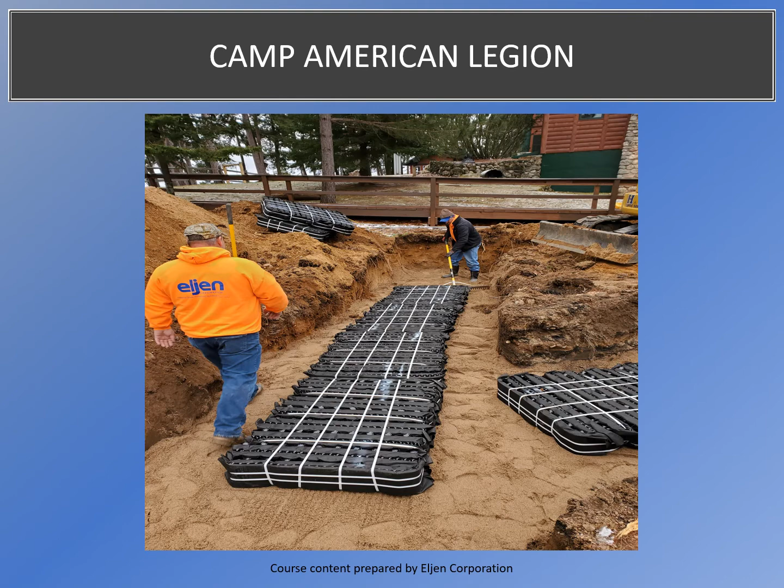Camp American Legion is located on Lake Tomahawk in Wisconsin. They have 16 cabins, all on septic systems, and any veteran is allowed to go there, stay, fish, hunt, or just relax in the location out in the woods free of charge. So we thought this was a worthy donation for us.

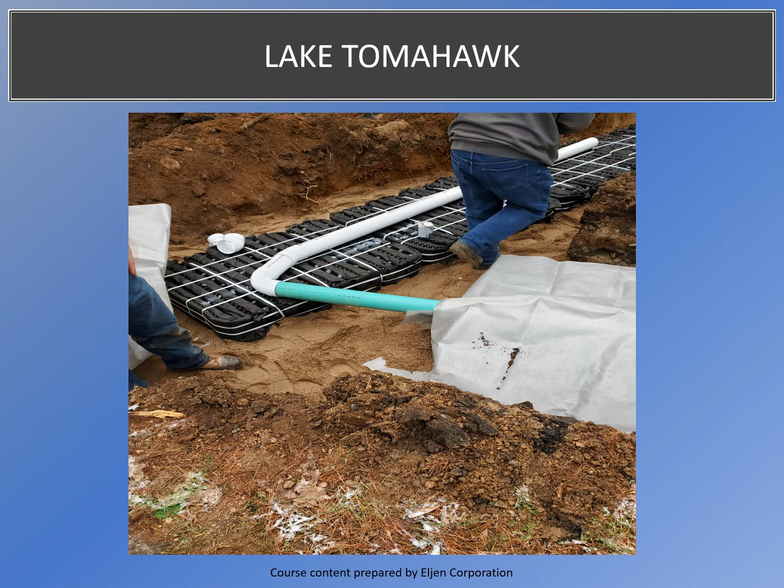Now let's take a look at some of the science behind the GSF. The scientific studies below show that the biological soil clogging is caused from septic tank effluent. This soil clogging will define the absorption rate. Geotextile fabric will improve the absorption rate by filtering out the solids.

Sidewall and bottom area do accept effluent, and the loading rates for highly pretreated effluent are going to be different because the soil will be able to process pretreated effluent at a faster rate than it would standard septic tank effluent. This led to the development of the Tyler chart.

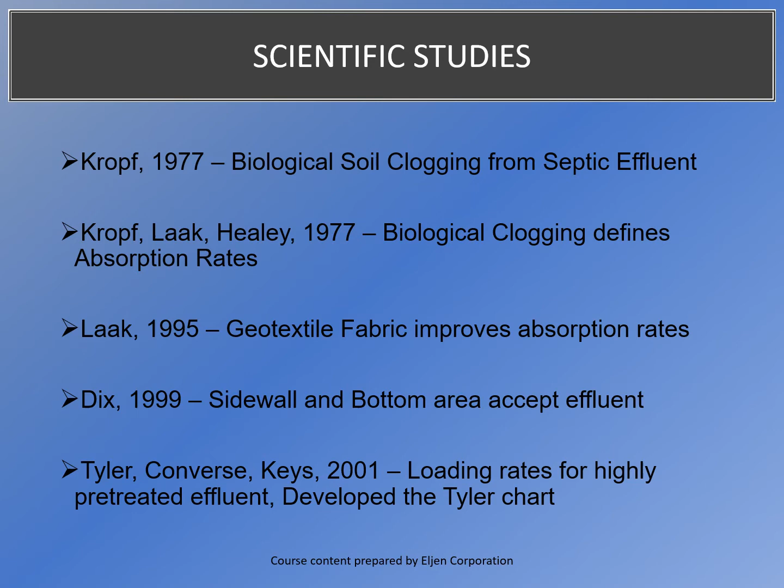The picture below shows the basic principles behind soil clogging. Heavy loading of the soil with liquid effluent can cause soil saturation. Long-term soil saturation reduces the aerobic activity within the soil. The reduced aerobic activity prevents the natural breakdown of organic material. Suspended solids in the effluent clog the soil pore structure, reducing the long-term acceptance rate of the soil.

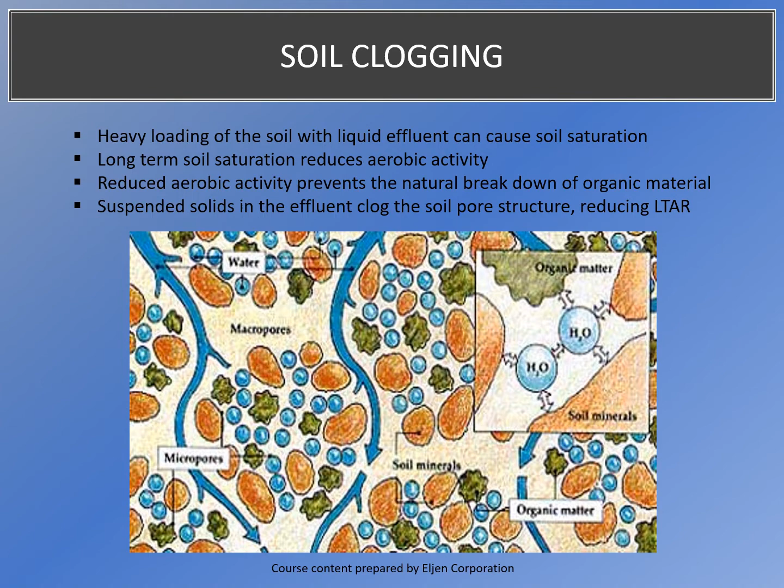What is biomat? Once the pore structure of the soil begins to clog and stay wet, biomat begins to develop at a faster rate. This is a naturally occurring tar-like substance, but it also processes biological solids and pathogens. When it grows to a thick barrier, it stops absorption, and then you will have a breakout and system failure.

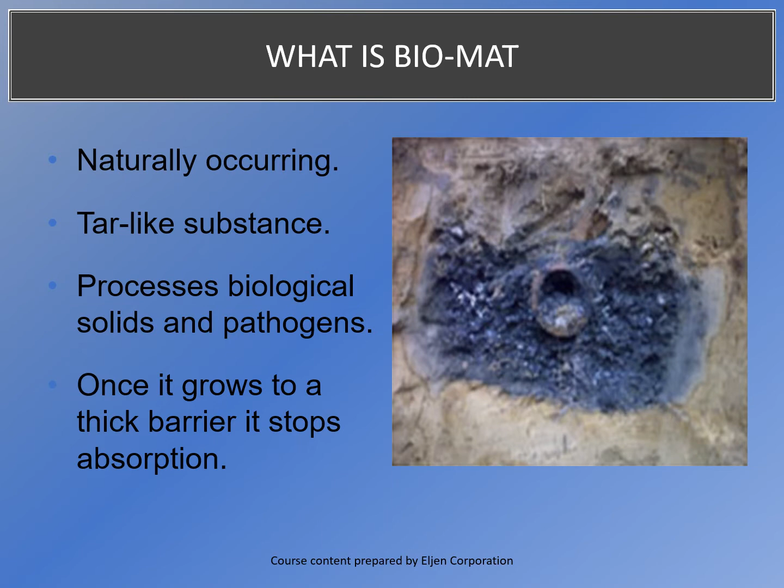Once you have soil saturation, the only bacteria that you are relying on to break down the biomat is anaerobic bacteria. Anaerobic bacteria is similar to the bacteria working in the septic tank. It does not use oxygen. They are typically in saturated areas. They are more capable of breaking down inorganic solids than aerobic bacteria.

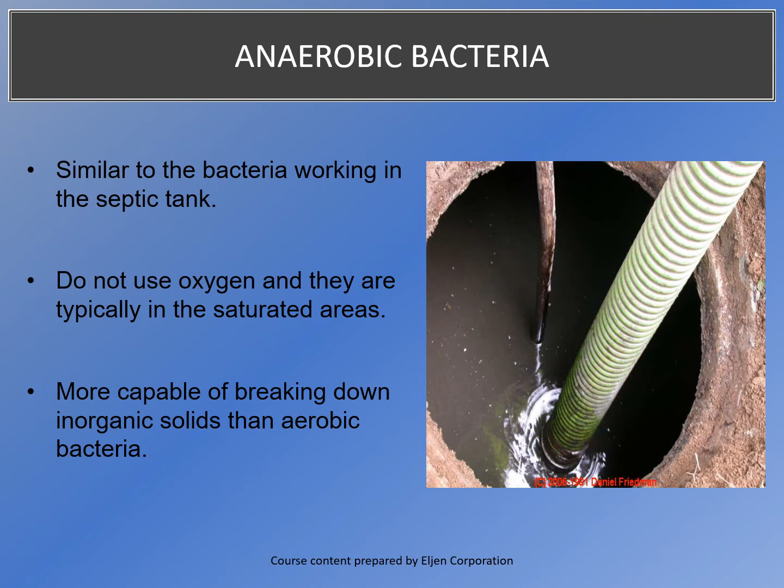You can see the aerobic bacteria is larger than the anaerobic bacteria. It's also better at breaking down human waste, but it does require oxygen, and it helps break down the biomat to keep it at a manageable level.

If you were to look at the two bacteria under a microscope, the anaerobic bacteria might twitch, move a very little bit, but not much action, whereas the aerobic bacteria will be darting around, going back and forth, very active. It's always looking for food and always wants to eat. That's why it's better at breaking down human waste and organic material than the anaerobic bacteria.

So how does the GSF work? At Eljen, we like to explain how the GSF works by comparing it to the tidal effect on a pier pylon. Where does this pier pylon rot? They don't rot below the water level on the bottom in the sand. They don't rot up on the top where the decking is. They rot between the low and high tide level.

So if you can imagine, the pylon is the geotextile fabric providing vertical surface area inside the module. When the high tide effect comes in, or when your system is dosed, it's depositing organic material on the geotextile fabric. As the effluent leaves the GSF module, it becomes an aerobic treatment zone. The aerobic bacteria go into the module and they begin to eat all the organic material, keeping the biomat at a manageable level.

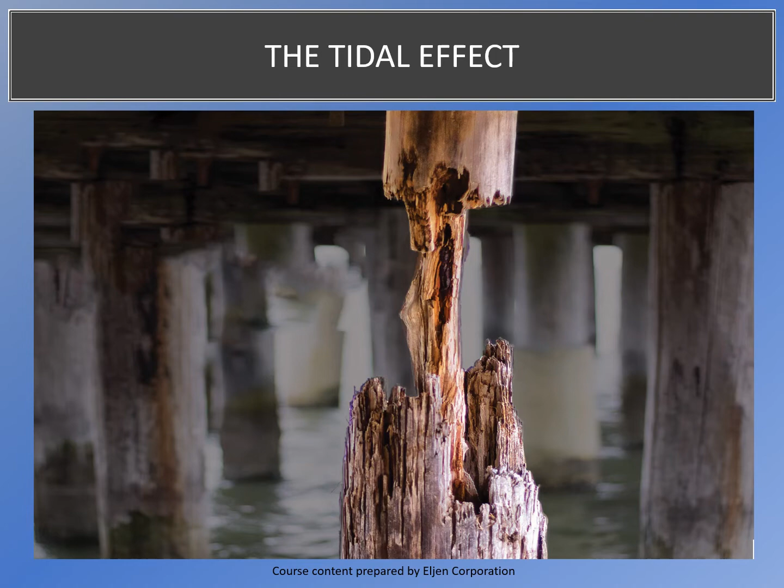The geotextile fabric within the module provides surface area for filtration and biological development. This promotes biomat growth away from the soil interface, preserves the sand soil interface by minimizing clogging and promotion of unsaturated flow. Having this effluent build up on the geotextile fabric and having the module surrounded by the sand will allow the effluent to flow out at a metered rate.

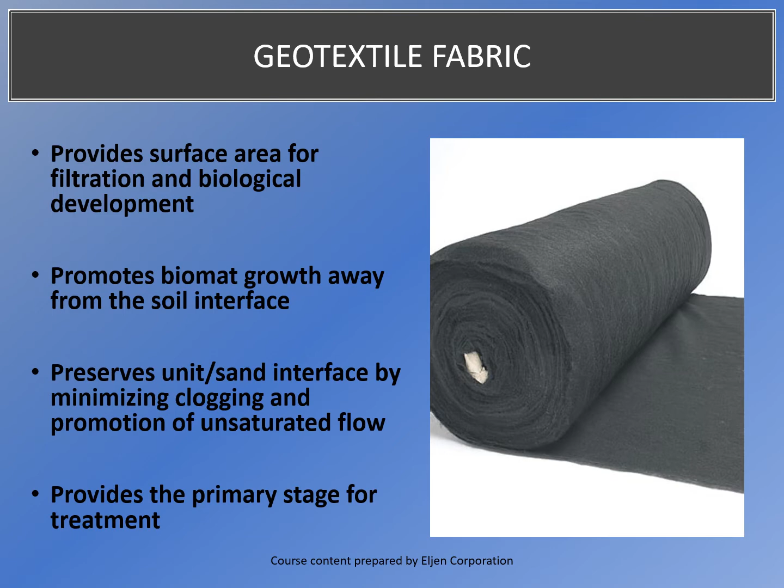So if you have a really fast soil, the effluent is still going to get treatment as it goes through the module and through the sand. If you have a really tight soil, a clay or something, the effluent will flow out of the module at a rate that will not cause saturation of the soil. This geotextile fabric also provides a primary stage for treatment within the GSF module.

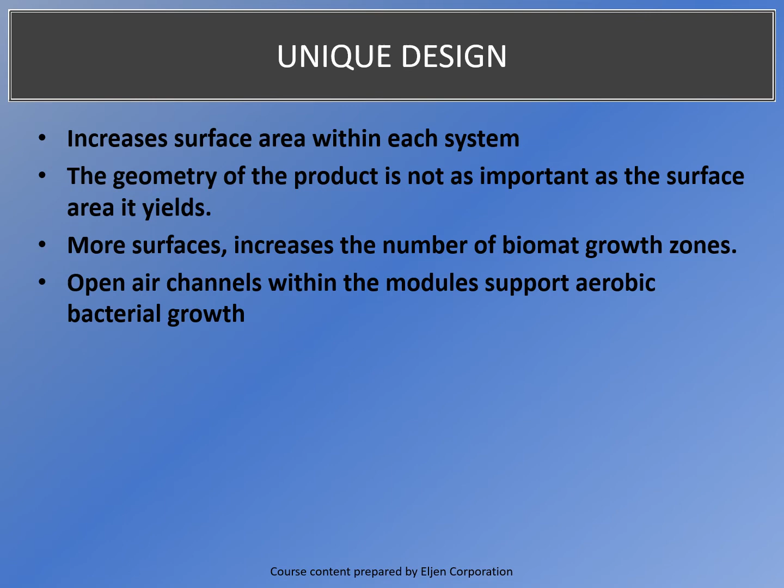The unique design within the GSF increases the surface area within each system. The geometry of the product is not as important as the surface area that it yields. The more surfaces increase the number of biomat growth zones, and the open air channels within the module support the aerobic activity.

Rain Locke is the designer of the GSF, and he sat down one day at his desk and drew these designs on a piece of paper. And he realized that he could get more surface area inside a 3-foot wide trench by taking advantage of the open space and creating vertical surfaces on the GSF modules.

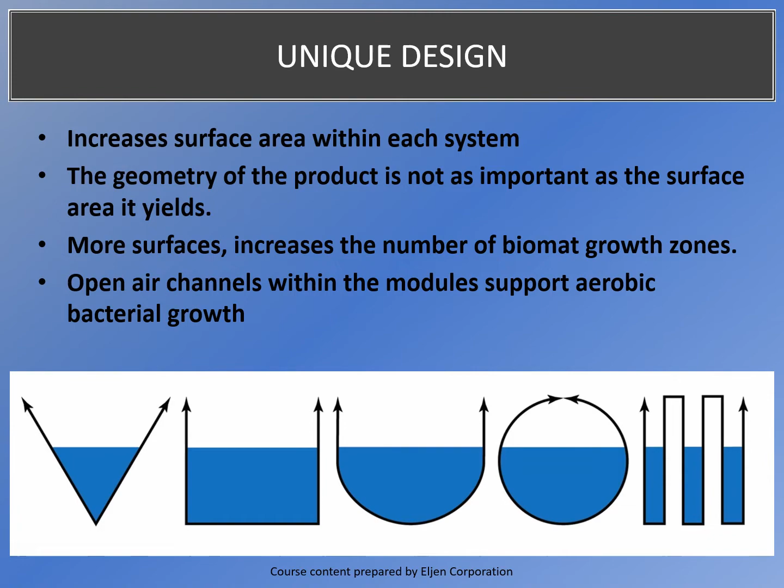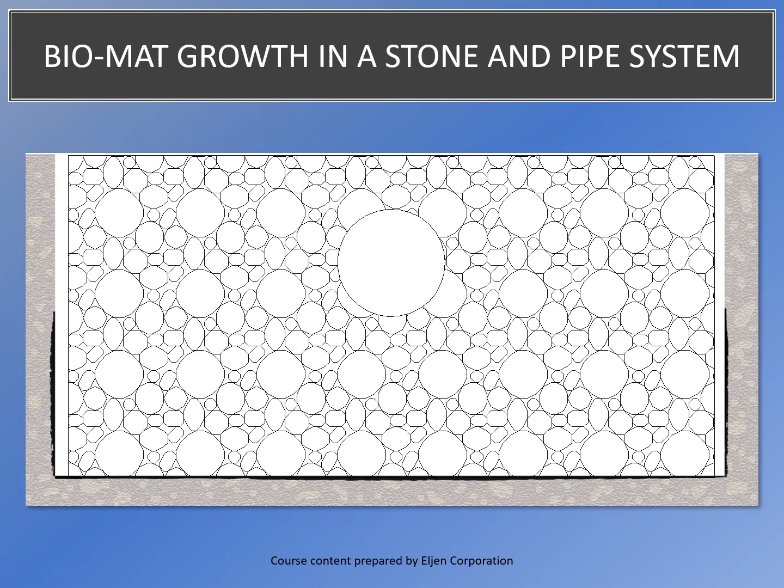The effluent that goes through the sand and into the soil is clarified effluent and looks like tap water, and has no odor when it goes into the soil. This increases your long-term acceptance rate.

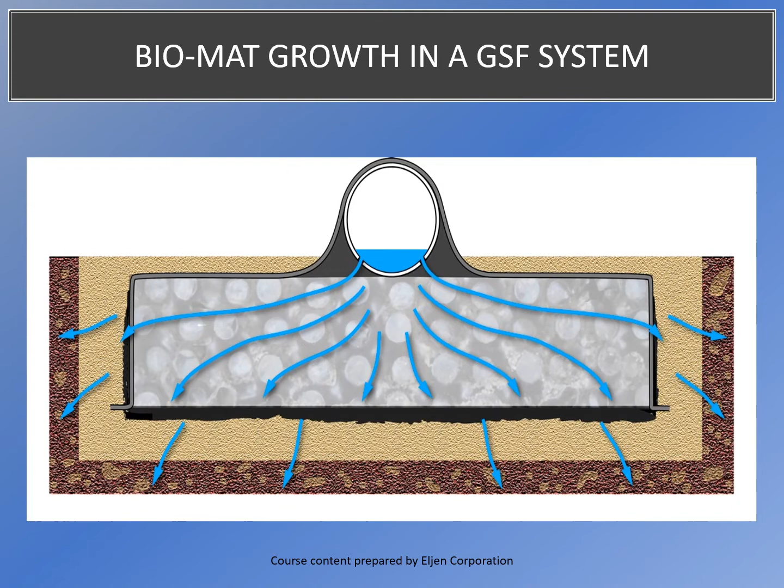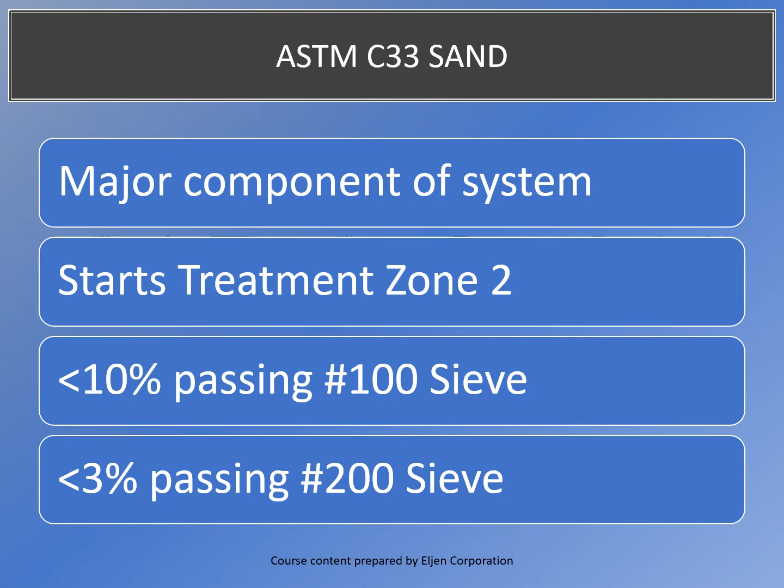The sand used below the GSF module is ASTM C33 sand. The ASTM C33 sand is a major component of the system, and it is the secondary treatment zone for the effluent. The requirements are less than 10% passing a 100 sieve and less than 3% passing a 200 sieve. The lack of fines in this sand make it very effective at treating effluent and not clogging the soil pores. This is just a picture of all the ASTM C33 sand specifications.

If you're using a sand that has excessive fines, the fines interlock with larger particles, preventing water from moving through the sand. The wastewater will pond and the biomat will quickly grow, shutting down the system. Fines are always a killer for sand-based systems.

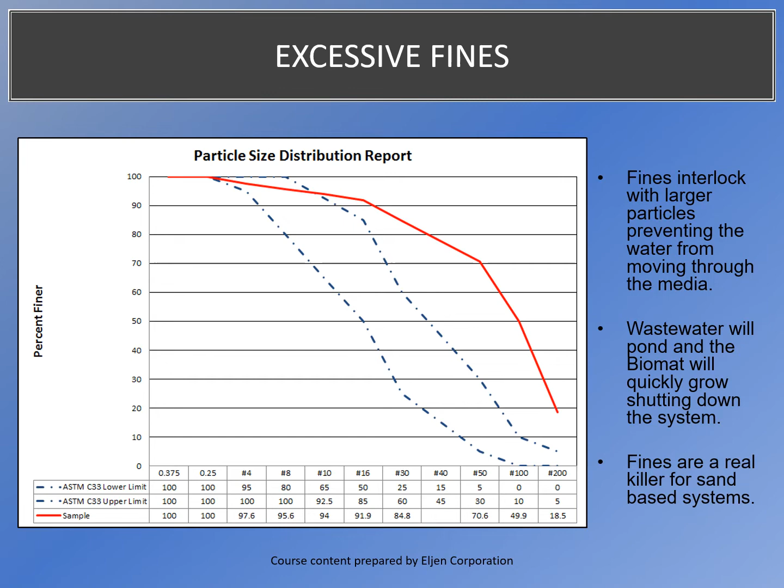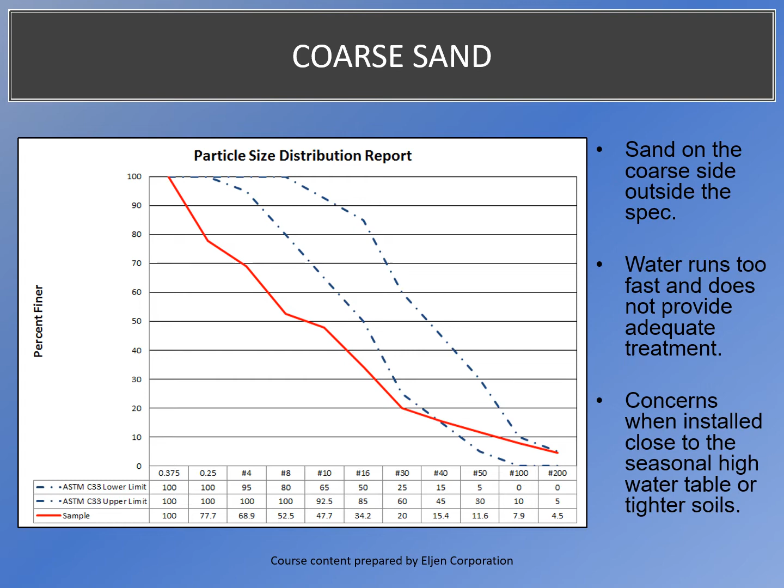Sand on the coarse side of the spec will allow the effluent to run out too fast and not provide adequate treatment of the effluent. The concern here is when installed close to a seasonal high water table, you could contaminate the water, or if you're in a tight soil, you could saturate that soil. You always want to use a sand that is in the middle of the high and low specification for the ASTM C33 sand.

Now let's discuss the GSF design options. The minimum sizing for a GSF A42 module is 6 modules per bedroom, or 6 modules for every 150 gallons of effluent. The A42 dimensions are 7 inches thick, 3 feet wide, and 4 feet long. The white stripe you see on either end represents the top side of the module.

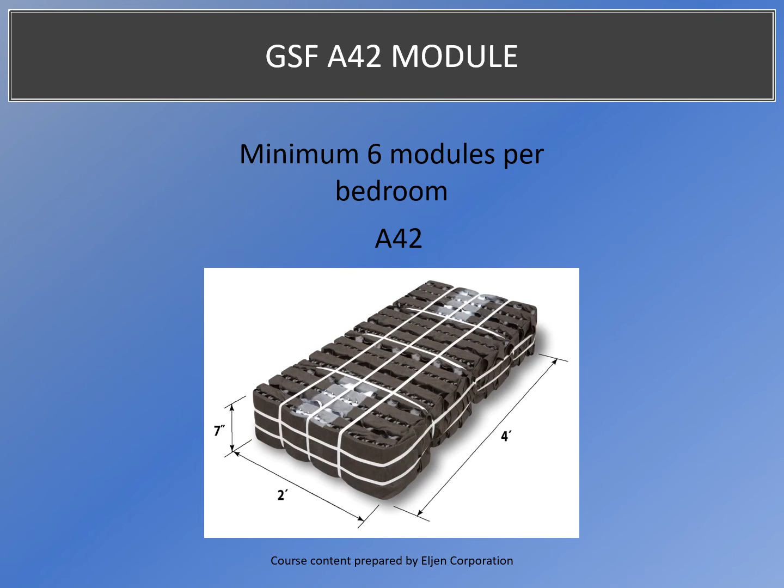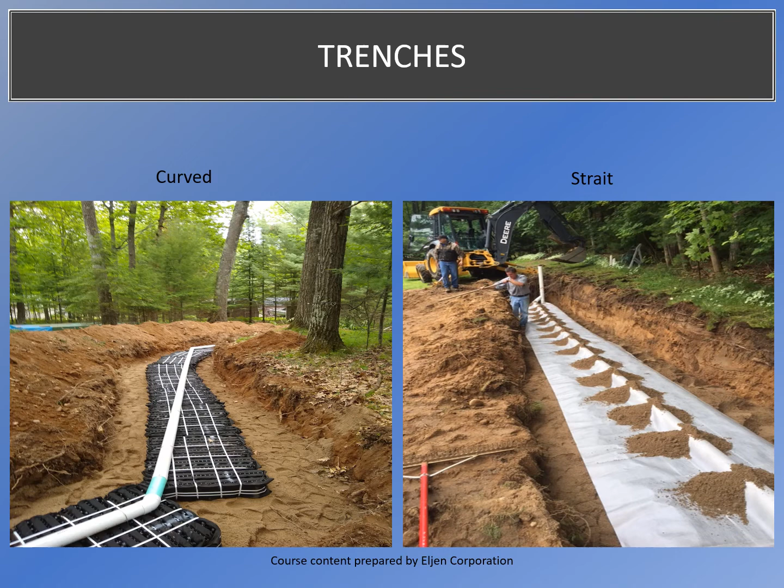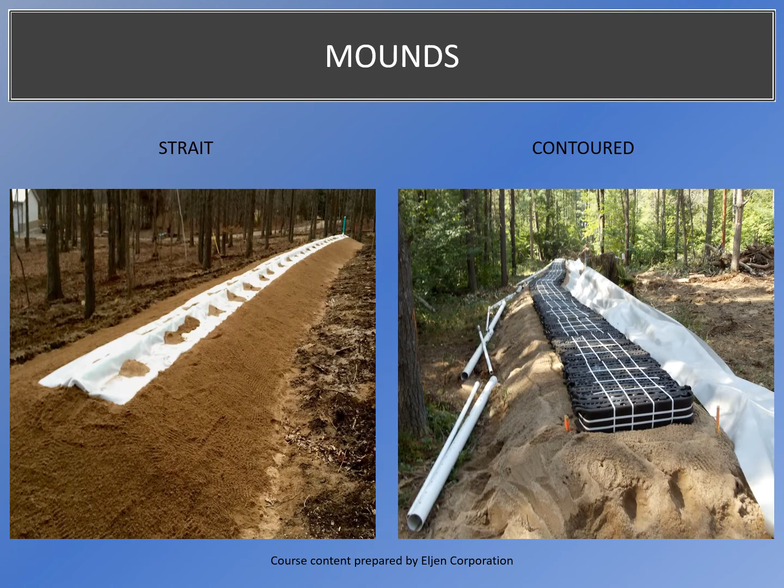Trench installation options are curved or straight. The picture on the left is a zigzag, and this was on a lake lot where the new homeowner tore down the old house, built a larger house, and did not want to remove any trees. We were able to zigzag the system in between his driveway in the front yard and his neighbor's driveway while meeting all the setbacks. The GSF models can be installed in beds, and the mound options are straight or contoured.

This is an A42 trench cross section, and you'll notice that the trench is 36 inches wide, while the A42 module is 24 inches wide. 6 inches of sand is required on either side of the modules when placed in the trench. 6 inches also goes at the very end and at the beginning of the trench rows. We also require a minimum of 6 inches of sand below the module and 12 inches of cover as measured from the top of the module.

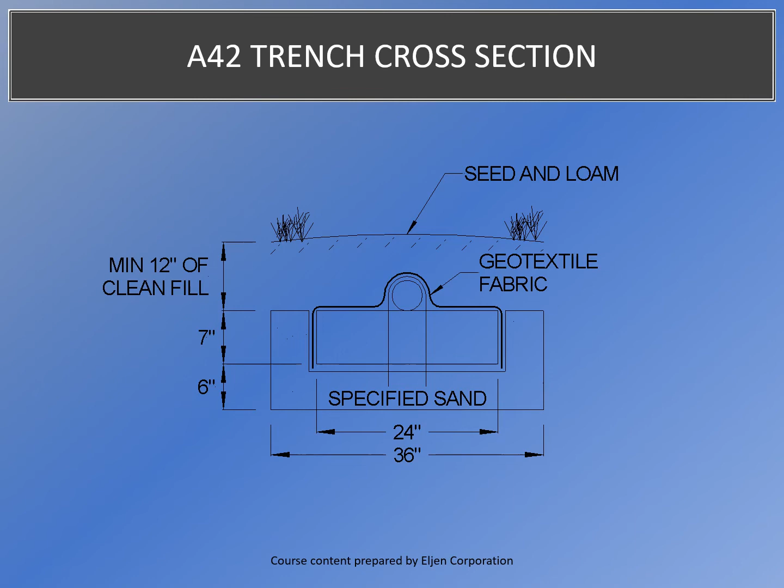This is a trench plan view. You can see that the modules are placed end to end, lengthwise in the trench and surrounded by 6 inches of C33 sand. This is multiple trench rows where you are required to have a minimum of undisturbed native soil in between the trenches. Please refer to your county code for the distance. This one shows 6 feet. Some counties require 9 feet. Some counties require 3 feet. So please refer to the code.

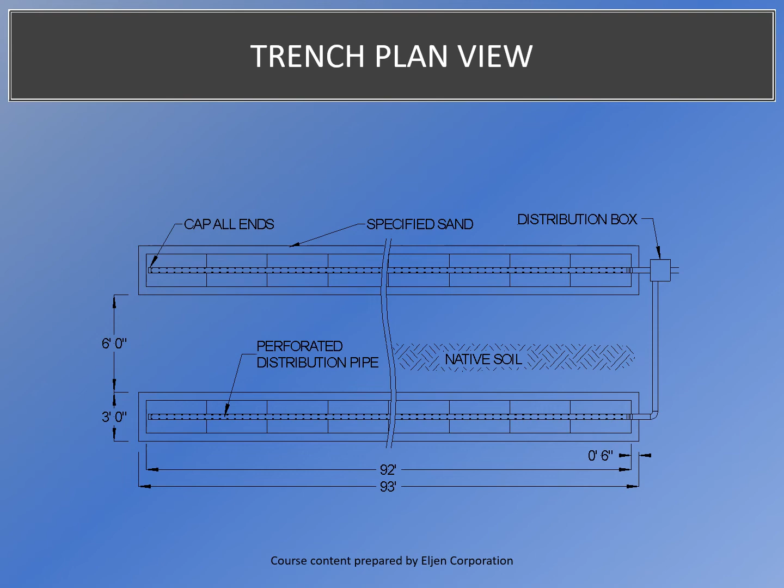Here's a bed cross section, and you can see that there is no native material in between the rows, only sand. It's a minimum of 6 inches on either side of the module, so you have to have a minimum of 1 foot of sand between the modules. Typically, we center the 2 rows inside the bed.

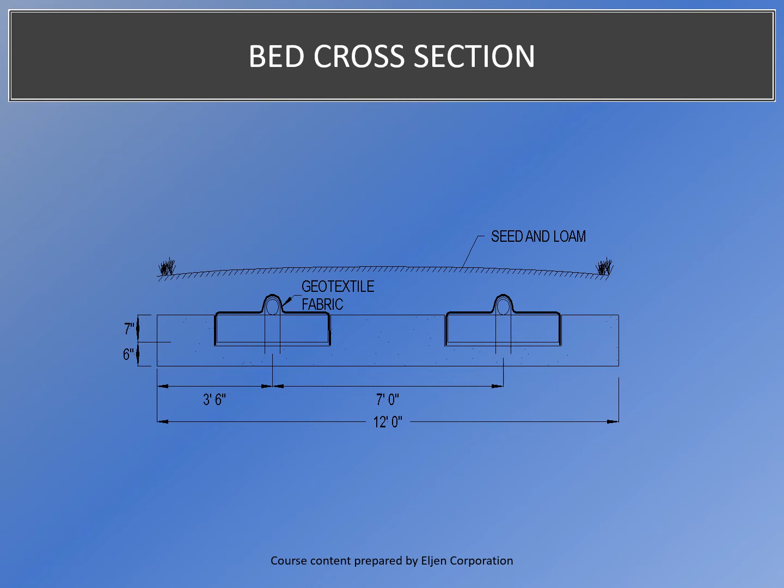Here is the bed plan view. You can see that we have 6 inches of sand on either end of the modules as they are installed, but the 2 rows are centered inside the bed system.

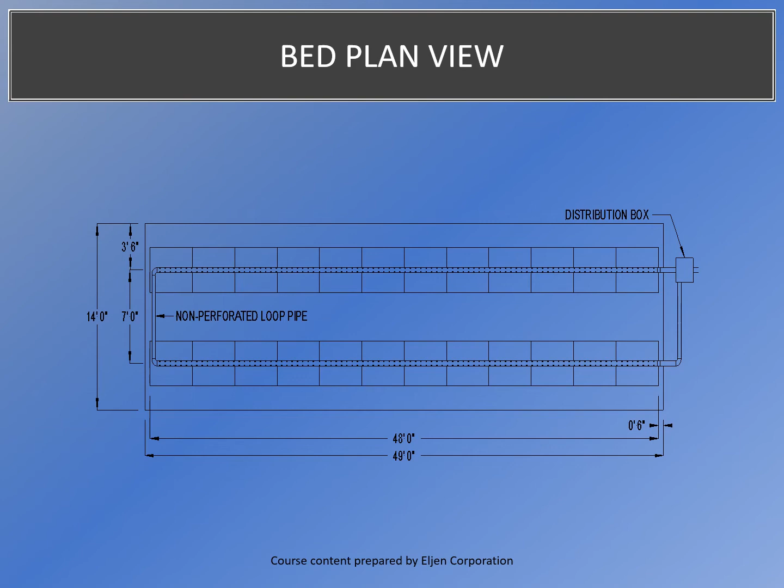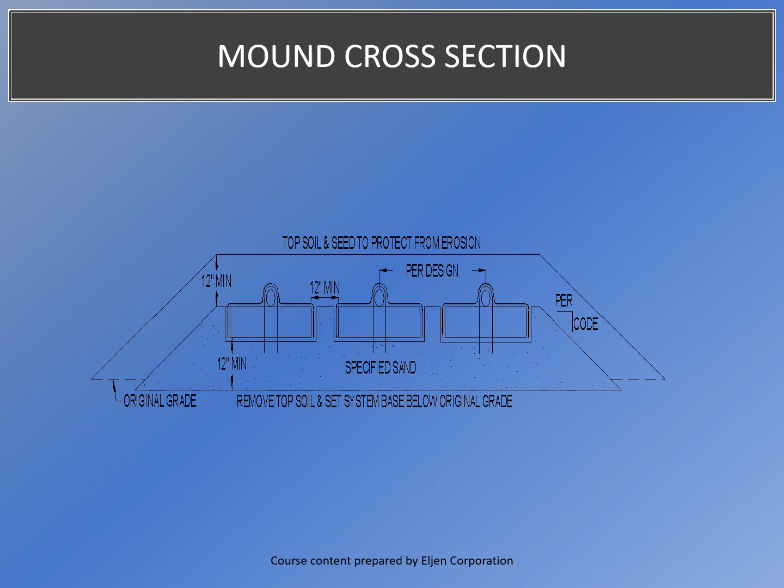Usually there's a 3-to-1 slope on the sides of the modules in your mound, and depending on the slope of your site, your toe will vary. The distribution methods for the GSF system are gravity or siphon dose. You can do a pump to gravity where we like to use a D-box, or pressure distribution is allowed.

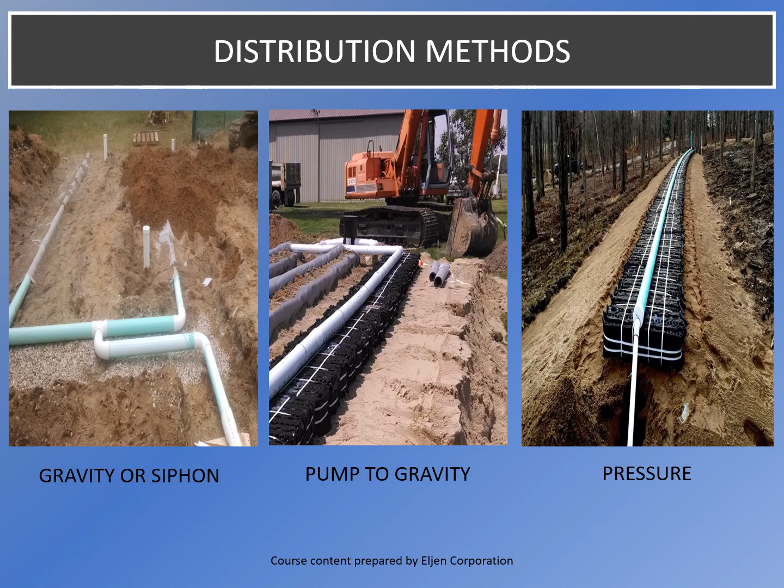When installing a pump to gravity system with a distribution box, Eljen requires that a velocity reduction pipe be installed about 2 to 3 feet before the distribution box. If the force main gets pumped directly into the distribution box, the high velocity flow into the box may force effluent down one pipe faster than another. By installing the velocity reduction, it will allow the distribution box to fill at an equal level.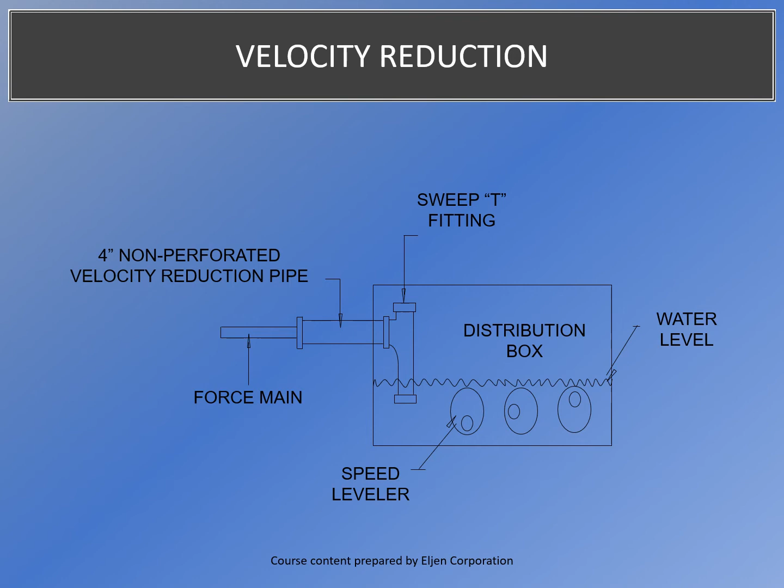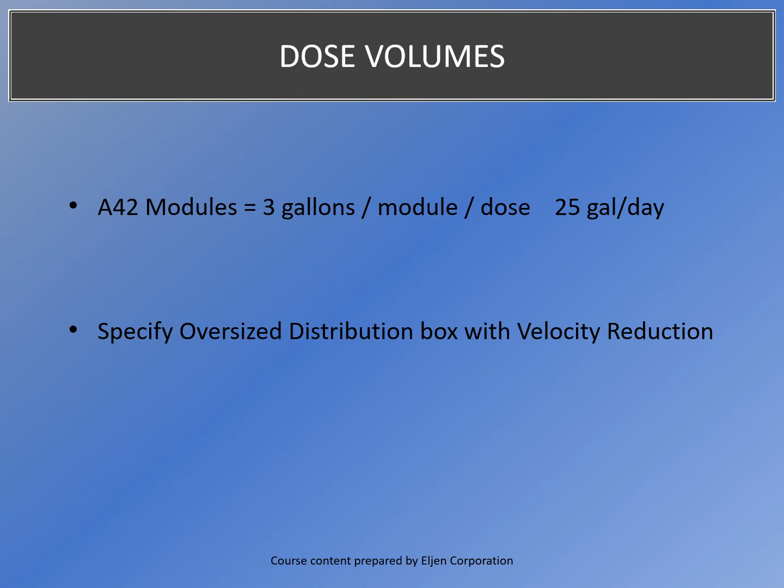The dosing volumes for the A42 modules are 3 gallons per module per dose and 25 gallons per module per day. Next, we will be covering the installation. First, you must prepare the surface by cutting and removing all vegetation as close to the surface as possible.

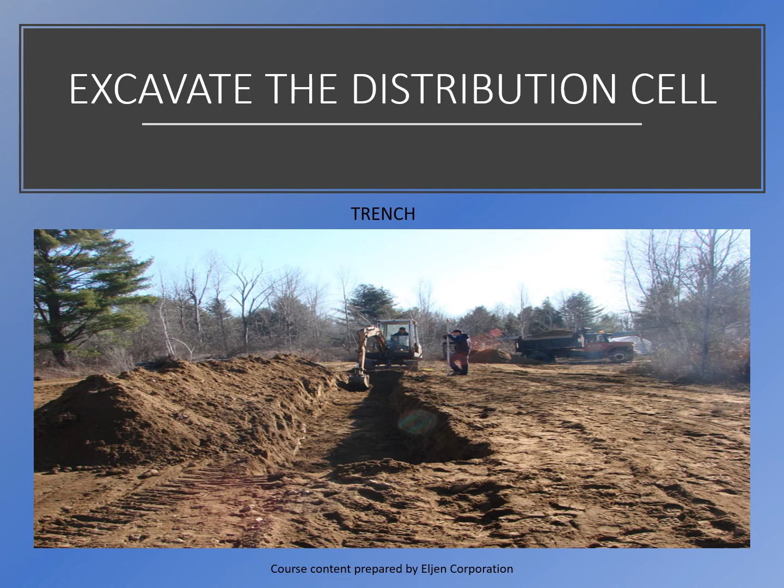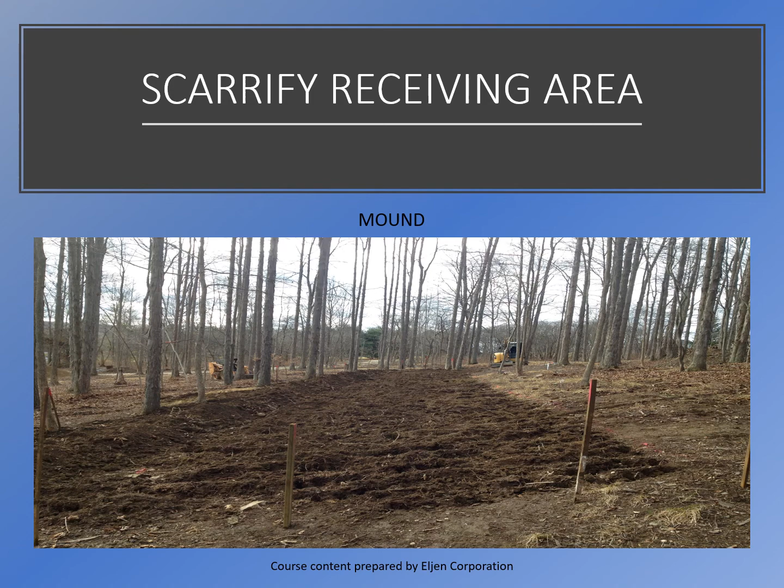Next, we need to excavate the distribution cell. This one is a trench excavation. For a mound, we will scarify the receiving layer or chisel plow. Here is another picture of a mound with scarification. The next step is to place the C33 sand.

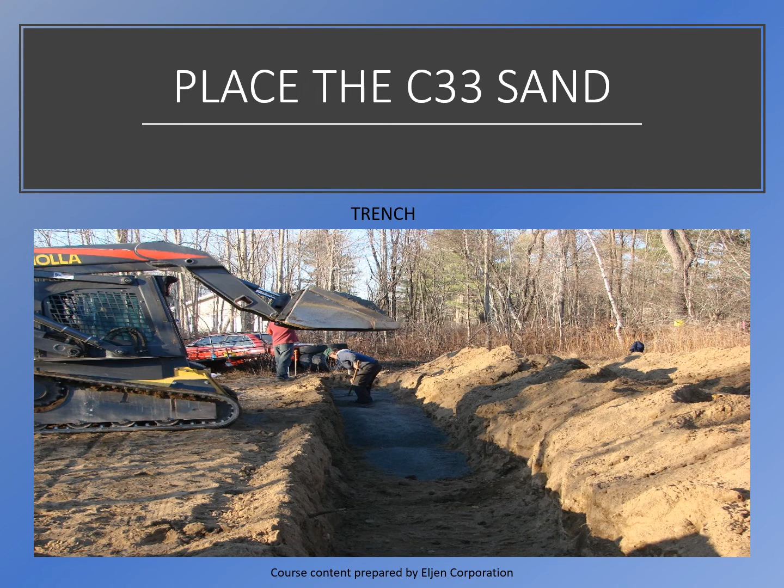Once the sand is placed, we need to stabilize it with the bucket of the backhoe, vibratory tamp, hand tamp, or walk it in. If we don't stabilize the sand, the first time the effluent gets distributed, the sand will find its own level and you could have an uneven system. When placing the sand, be sure not to drive over or walk on top of the scarified surface.

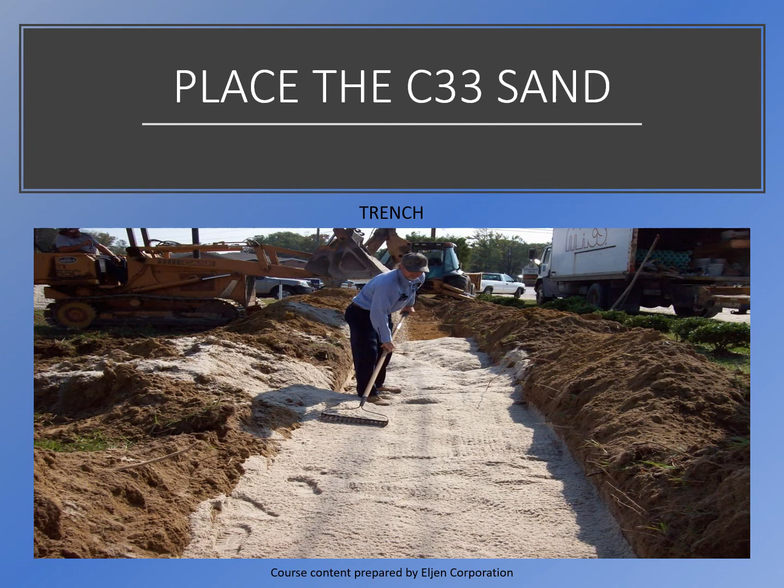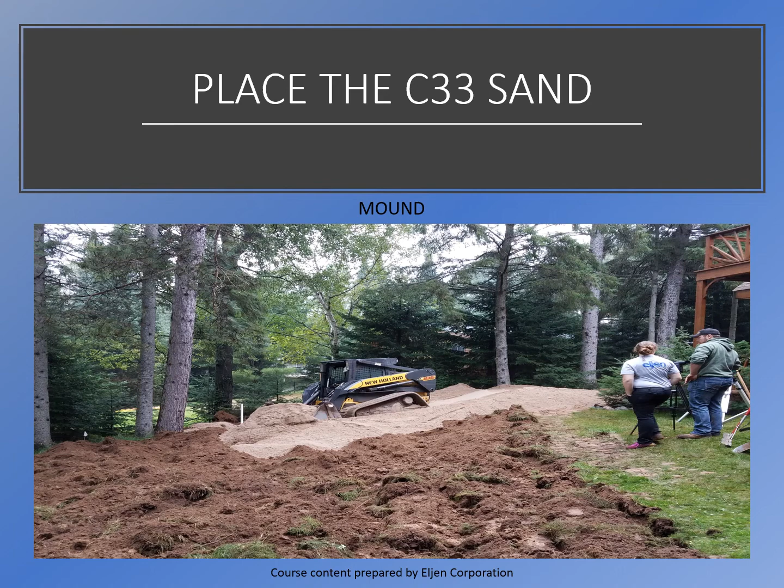Here's an in-ground bed with the sand placed. This picture shows the sand being placed over a chisel plowed mound. You want to make sure that you're driving over the sand. This way the sand will mix with the native soil and it'll provide an excellent transition zone for the effluent to pass through.

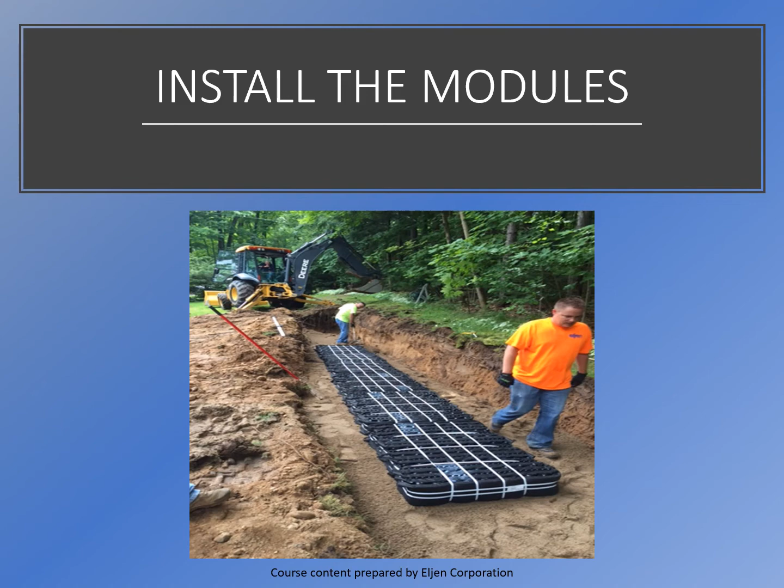Once the sand is in place, the modules need to be installed end to end after everything is raked level. Install the modules either in single or multiple rows. This is a mound configuration with multiple rows. Once the modules are installed, you can begin to lay out your distribution network.

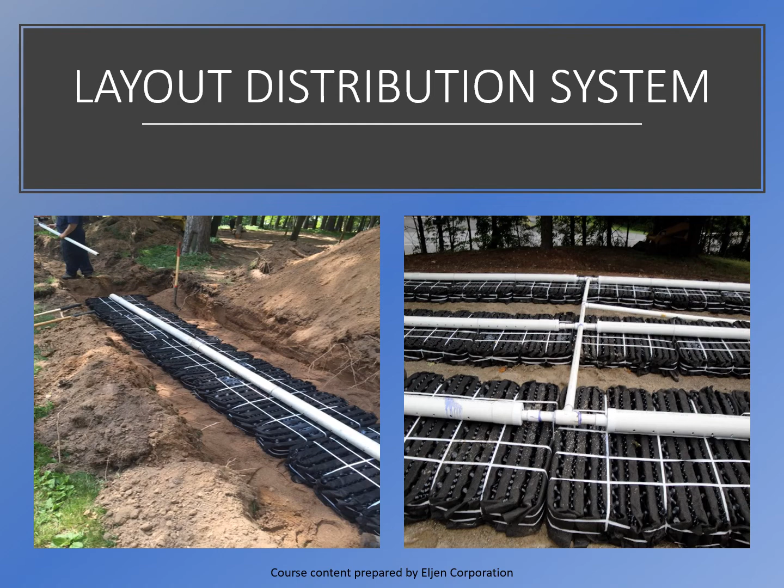When you lay out the distribution network, in order to secure it, there are wire hoops provided by Eljen. Use one wire hoop over the top of the pipe on each module. To install the wire hoop, place it over the distribution pipe and press it through the module into the sand.

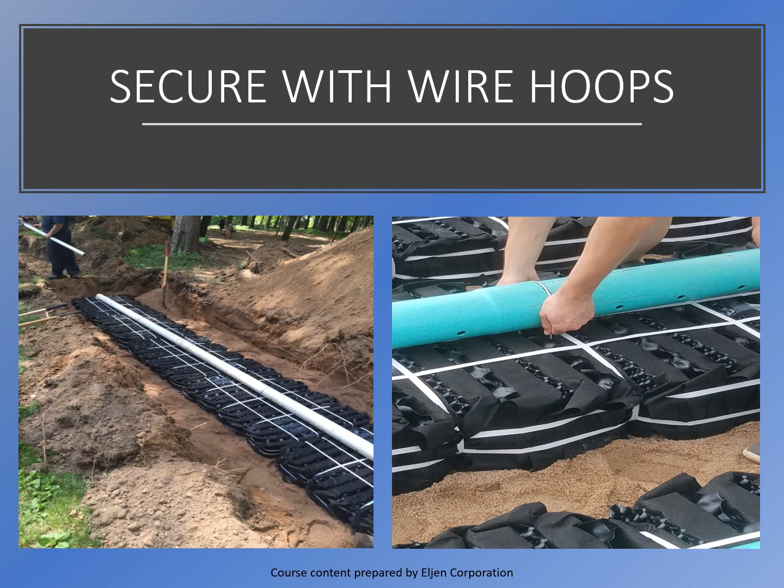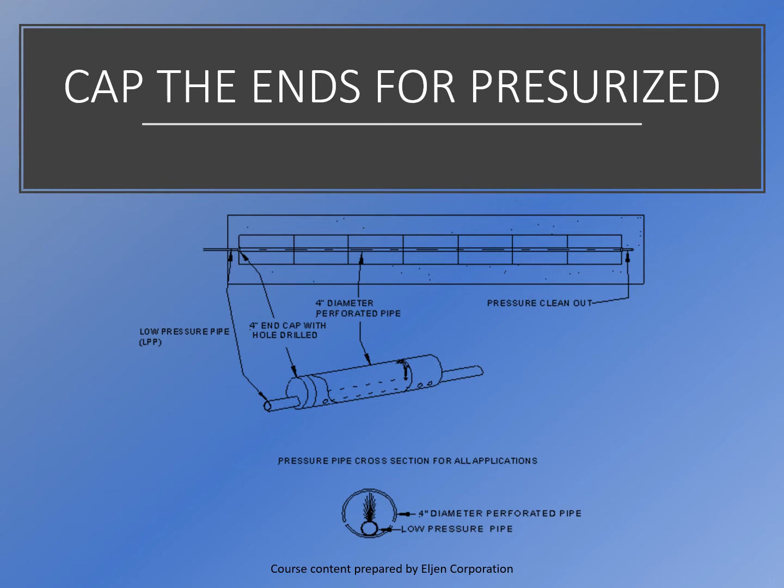When laying out your distribution network, make sure that the ends are capped. Eljen likes to use the pipe in pipe method for pressure distribution. So you cap the ends and use a hole saw to drill your 1.5 or 2-inch low pressure pipe hole.

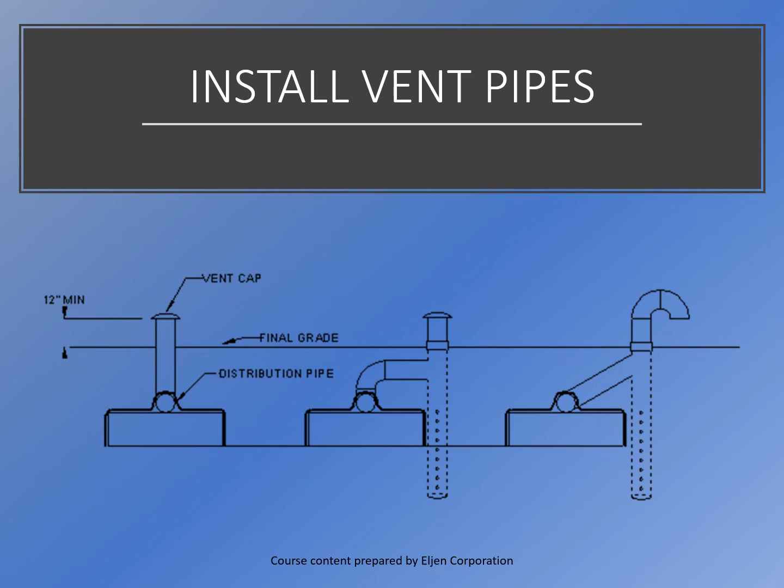Vents are required on the Eljen GSF system if you have 18 inches or more of cover, or if your cover material has clay and will restrict the flow of oxygen down to the modules. You can install a shared vent for multiple rows or a vent on each row.

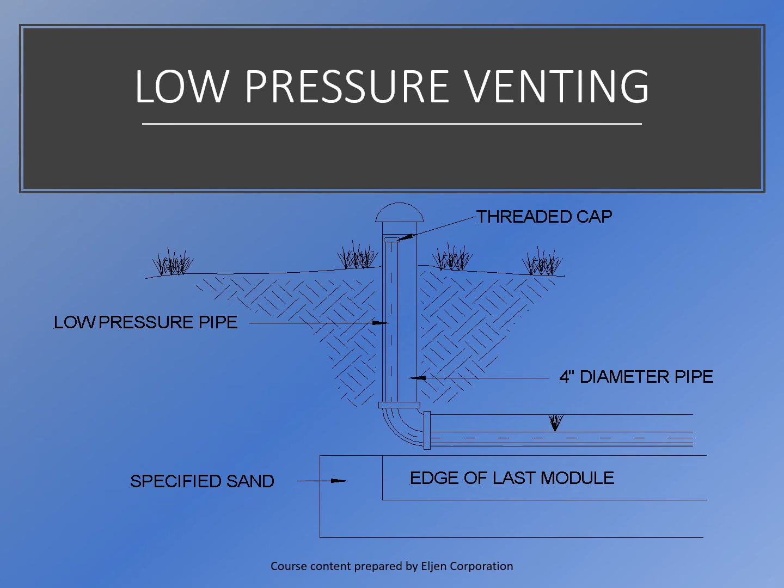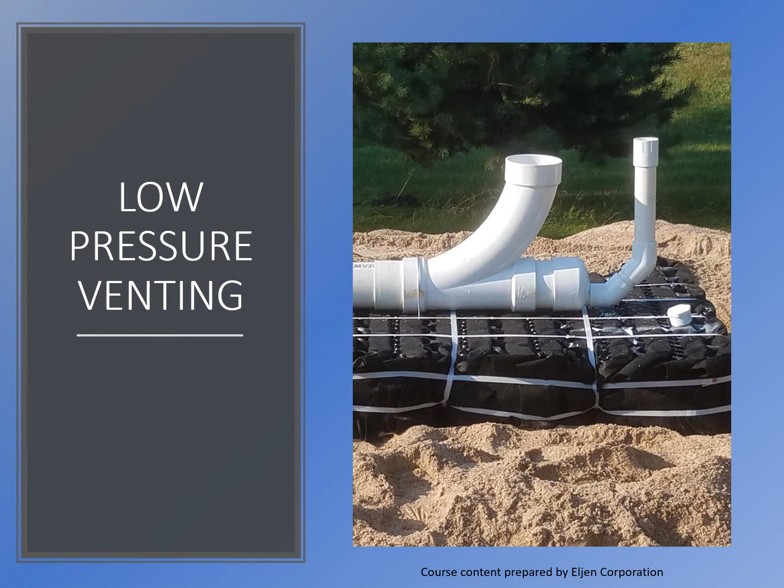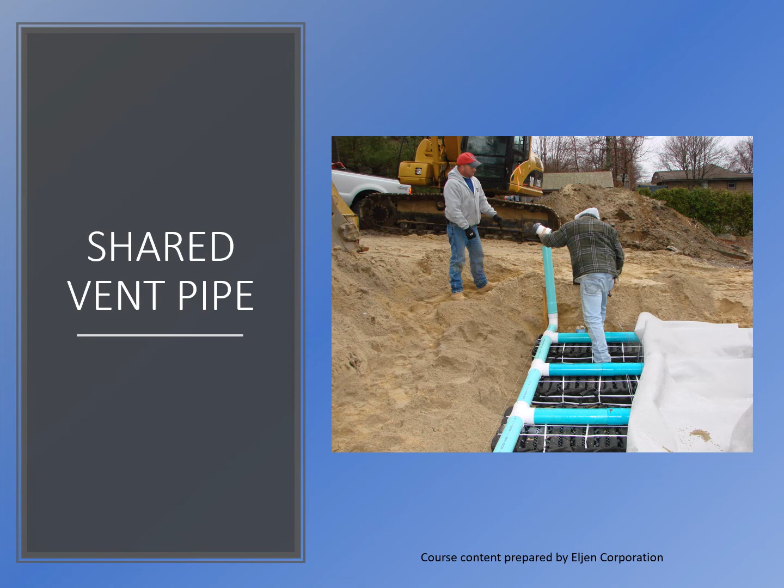This is a 4-row system with the vent pipe placed in the corner on a gravity system. This is fine. It can be in the middle, it can be in the corner. You can put 2, 3, 4 vents on it. 1 vent is fine. Once the distribution network is installed and secured, spread the Eljen supplied gray cover fabric evenly over the top of the modules and the distribution pipe. Let it hang down the sides.

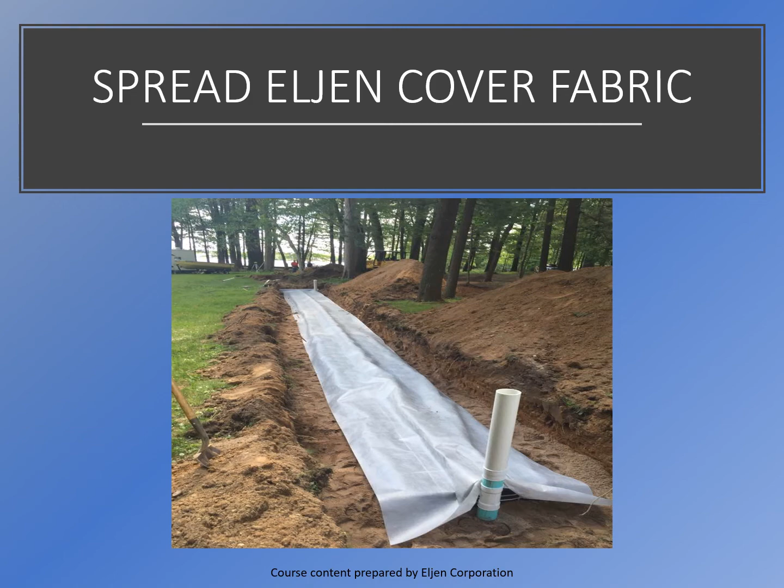Place shovelfuls of sand or topsoil over the top of the distribution pipe so that it falls down on both sides to secure the fabric. We don't want to have any tenting. If you are throwing the sand up against the side of the pipe, you could block the distribution holes in the pipe.

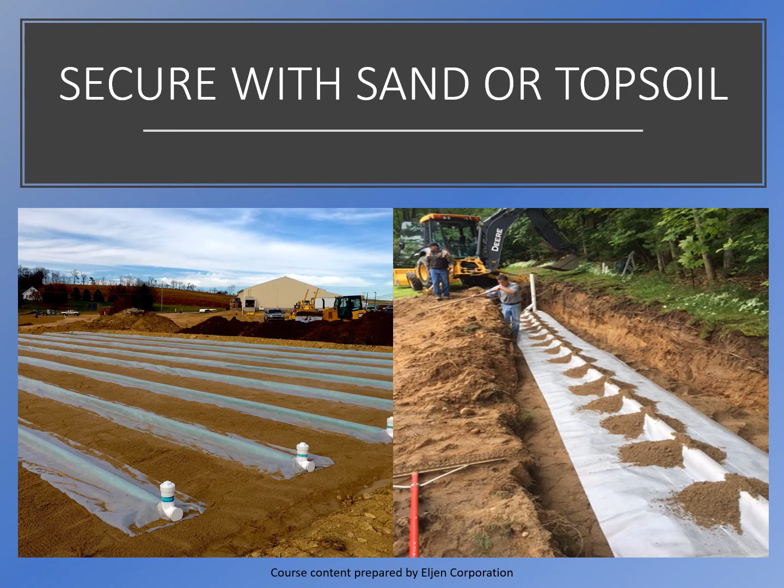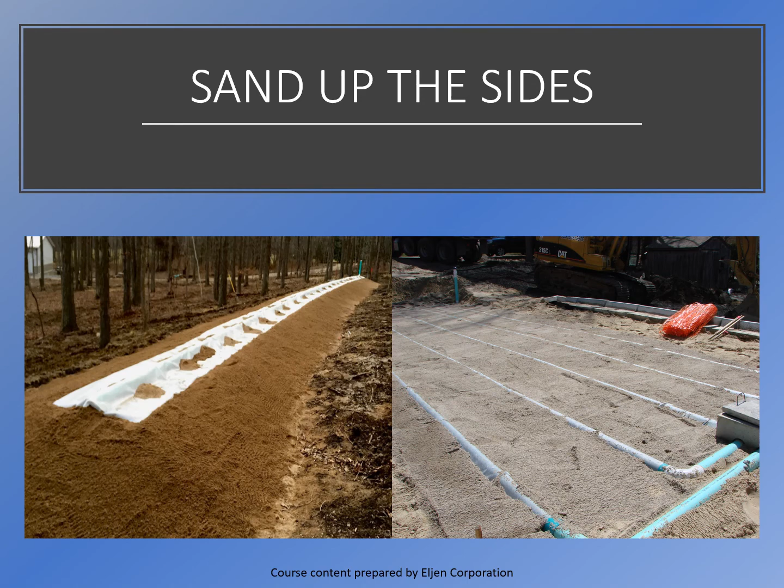Once the fabric is secured on the top, bring the sand up the sides of the module so that it is even with the top edge of the module. If you have extra sand, you can throw the extra sand over the top of the modules. It will not hurt it. It will only help the system to breathe better. Once all the sand is in place, cover and seed.

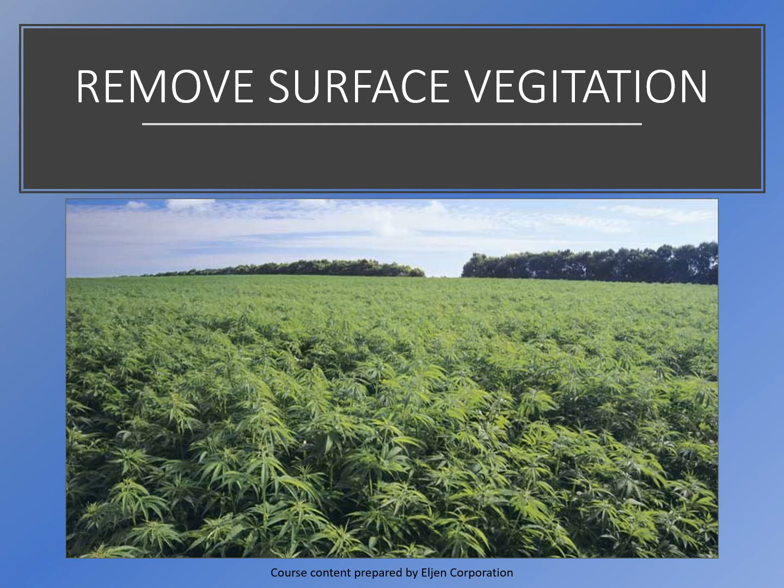Now I would like to go over some installation do's and don'ts. These are just the important things to remember when performing your Eljen GSF installation. Don't install under a driveway or any surface that will restrict the flow of oxygen. Remember to remove all surface vegetation and dispose of properly. This is one option of disposing of the vegetation in your basement.

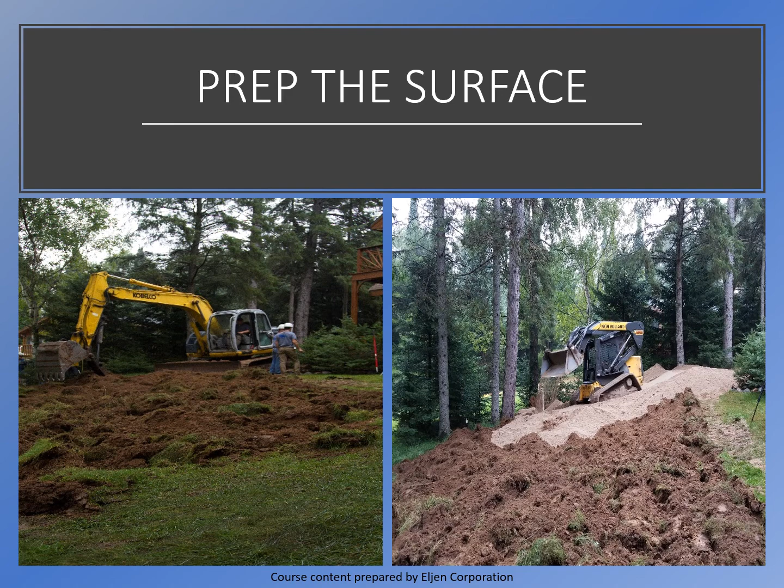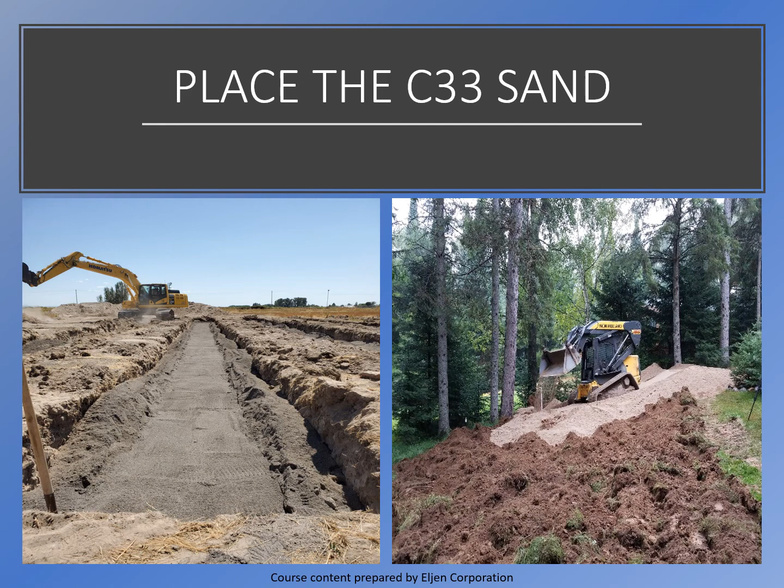Be sure to properly prepare the surface area by scarifying or chisel plowing. Always make sure when placing the sand that you do not walk in or drive on the chisel plowed or scarified surface. Always walk or drive on the sand. Place the C33 sand and stabilize with the back of the bucket. Install the modules end to end.

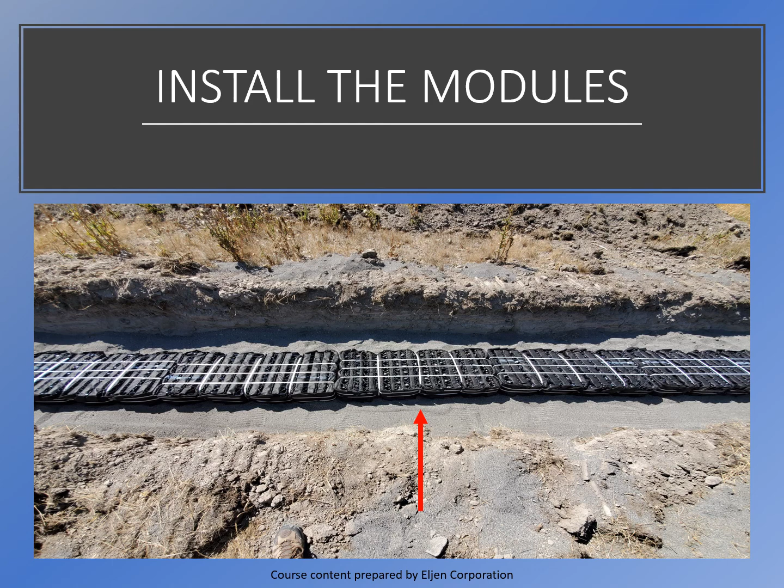It may be difficult to see in this picture, but the center module in there is upside down. The modules need to be installed with the white stripe up. But if you take a closer look, you can see that the module in the middle looks different. It has more open areas and less fabric showing. Here is a top and bottom view of the A42 module. You can see the white stripe painted on there. That indicates which side is up. The side on the left is the top, the side on the right is the bottom.

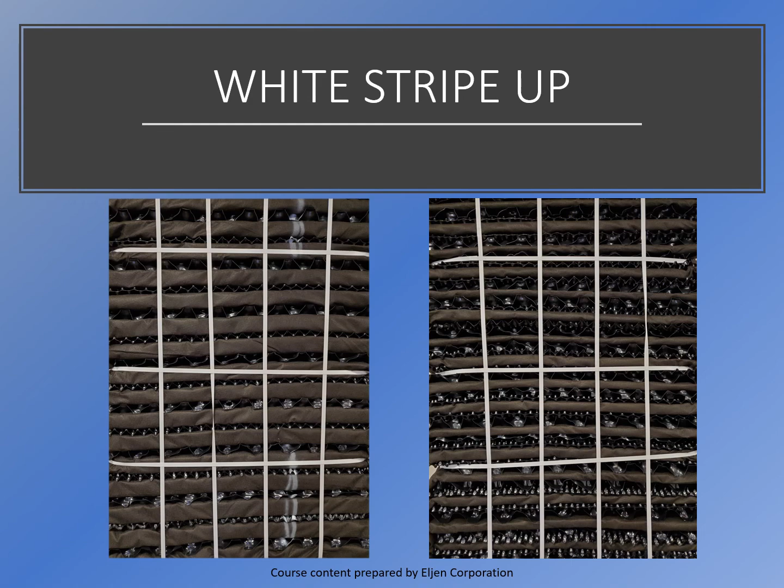The reason why there is a top and a bottom is we want to have the least amount of contact of the fabric to the sand. Those areas will develop more biomat because they are two wet surfaces together and will take longer to dry out. If a module is installed upside down, it is not going to fail the system, but it will develop more biomat under an upside down module than installed properly.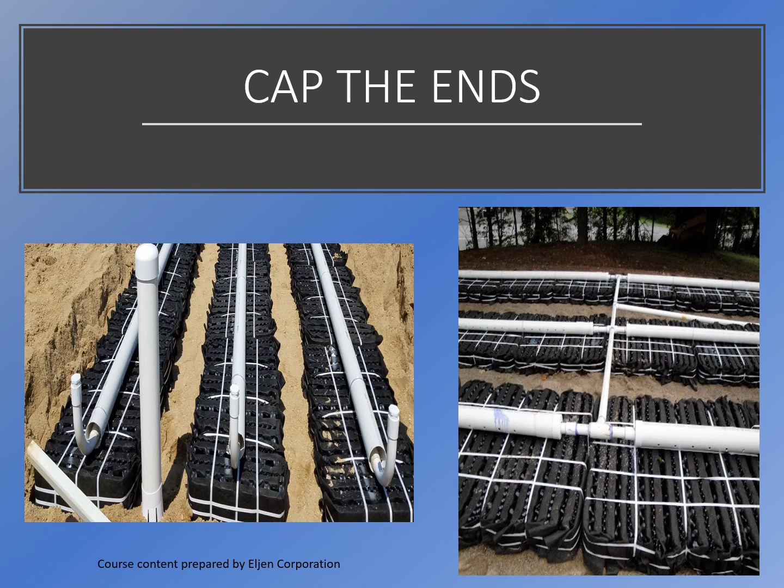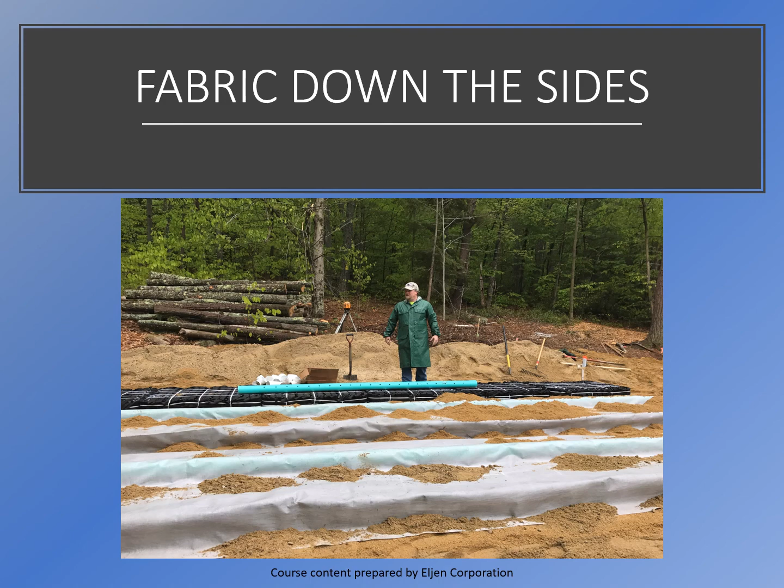Lay out the distribution network using one wire hoop per module to secure the pipe in place. Be sure to cap the ends, otherwise all the effluent is just going to run out on the last module and the first module. Make sure the fabric goes down the sides of the module. There will be extra fabric. Do not tuck it underneath. That will cause the same problem where the fabric will be a wet surface against the sand, which is also going to be wet, and it will develop more biomat there. Just let the fabric run out the sides and put sand in.

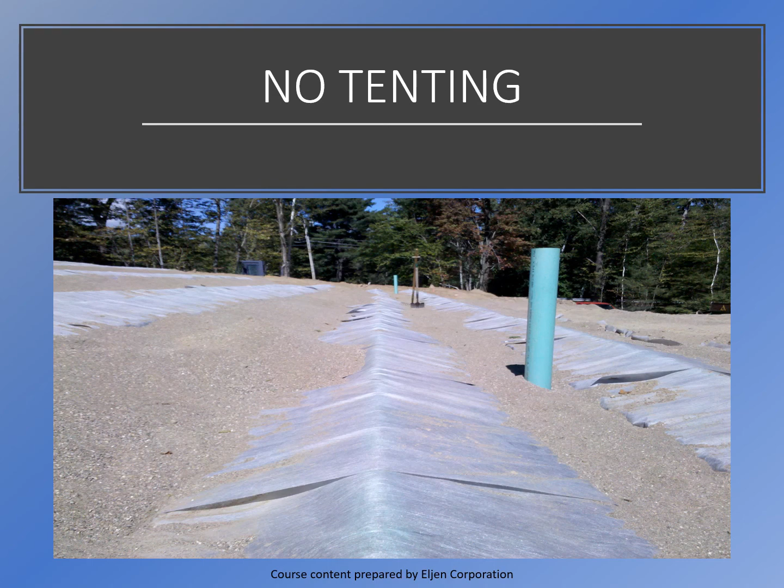When placing the sand on the sides of the module, make sure you have no tenting. Cover fabric that Eljen provides is high tensile strength, and it will deform your distribution pipe once you cover your system with topsoil. Make sure to bring the sand up the sides of the module to the top edge of the module. Keep the modules out of the seasonal high water table.

This was not an actual install. The modules blew out of someone's yard into the lake, but it did make a good picture. The customer wanted to know if they can still use them. All they have to do is empty out the water, fish, and sand, and they're still good to use.

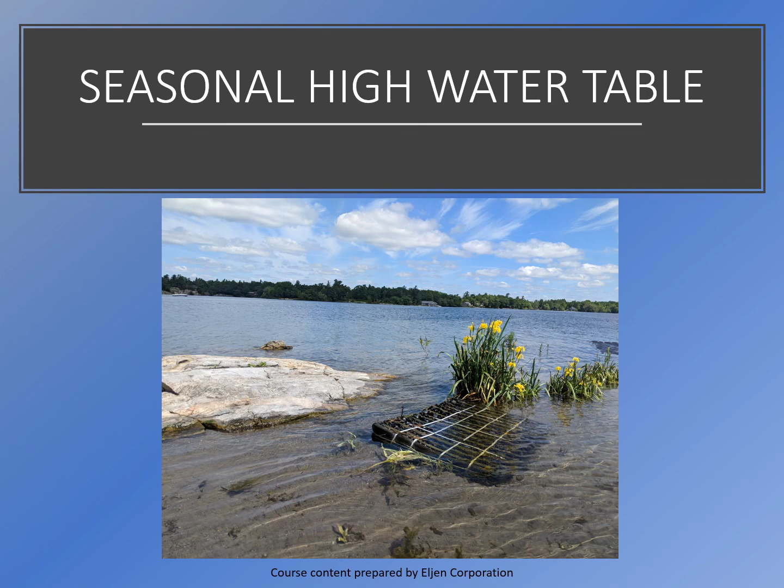This installer excavated the bed while it was raining, and he continued to work on the system during the rain. Then he installed the sand in the modules. It rained for the next couple of days, and it filled up like a swimming pool. If you excavate your bed or your trench or your mound and it rains and you have not put down the sand yet, you need to let it dry and re-excavate. That rainwater will seal off that system by compacting all of the area where you chisel plowed.

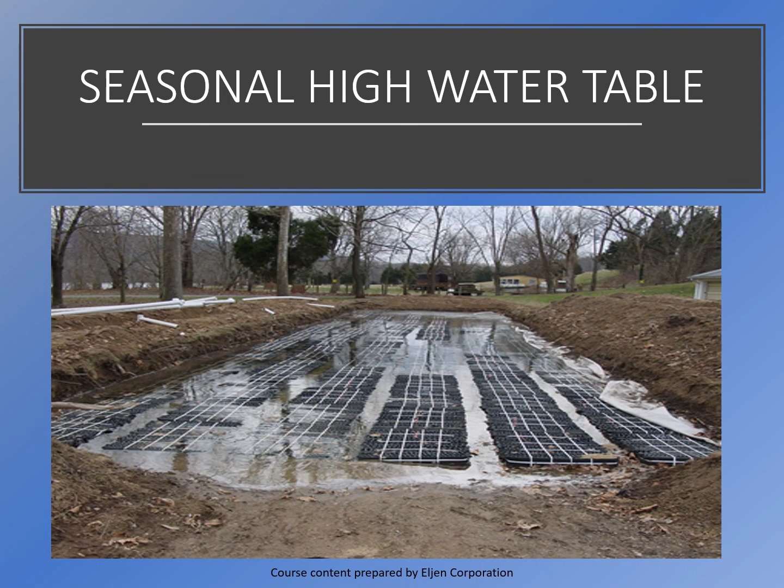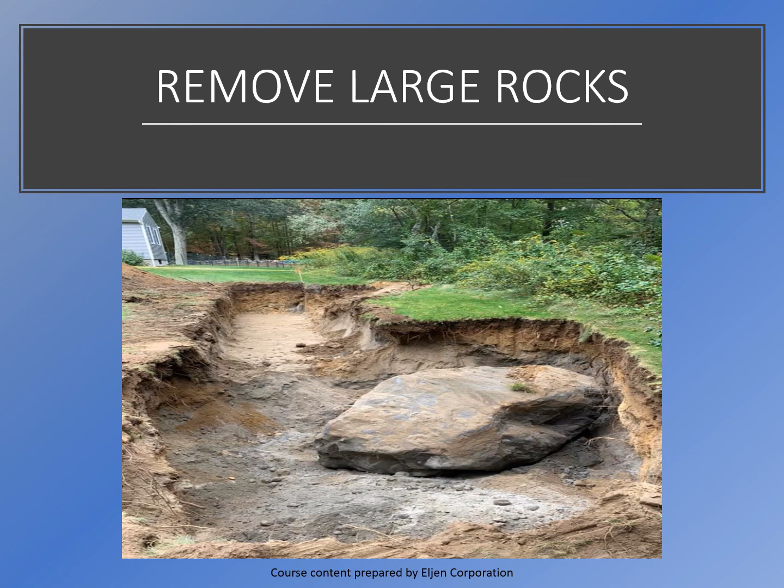Remove any large rocks or boulders. You can also go around. We saw we can contour or we can curve the system in the earlier slides. Then cover and seed. Divert all drainage and runoff so it doesn't go over the septic system.